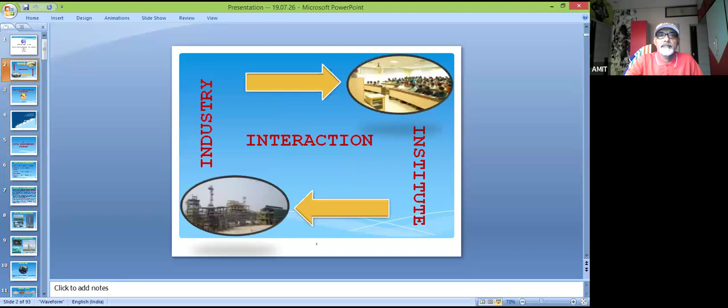अब आपके डेस्कटॉप पर जो भी फाइलें हैं वो शो नहीं करेंगी, केवल आपकी प्रेजेंटेशन ही शो करेगी। ठीक है, अच्छा हो गया सर, थैंक यू वेरी मच। ओके सर। हम थोड़ा वेट करते हैं, दस पाँच तक।

और हमारे कुछ और साथी जुड़ेंगे तो हम ऑन करते हैं। थैंक यू सर, थैंक यू। ओके। नमस्कार।

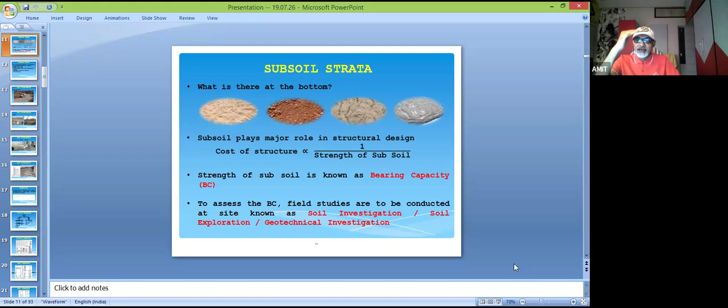See, every structure ultimately transfers its load to the ground. Therefore, understanding the behavior of soil is one of the most important responsibilities of civil engineer. Before construction begins, engineers conduct geotechnical investigations to determine soil properties, groundwater conditions, and bearing capacity. Without proper soil investigation, even the strongest structure can experience excessive settlement or failure. Remember the simple principle: a strong building always begins with a strong foundation.

Now, we'll touch upon various soil improvement techniques. Natural soil may not possess sufficient strength. In such situations, engineers improve soil properties using various stabilization methods or techniques. These include cement stabilization, thermal stabilization, electroosmosis, grouting, geotextile, reinforced earth, etc.

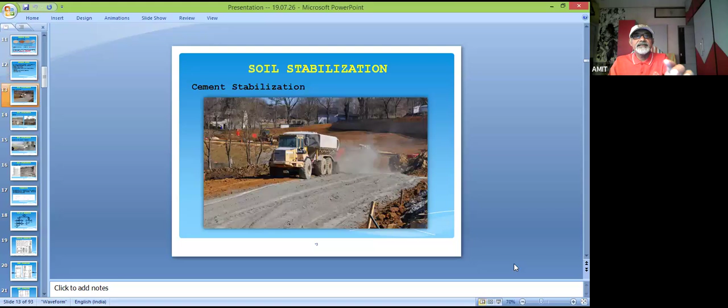You see cement stabilization, grouting we can show, geotextile and fabrics or geogrids, reinforced earth.

Choice depends upon soil type, project requirements, groundwater conditions, and of course, economic considerations. Modern ground improvement techniques enable engineers to safely construct highways, airports, bridges, ports, industrial plants, and high-rise buildings, even on weak soils, by way of soil stabilization or soil improvement.

This concludes the first section of today's presentation. In the next part, we shall move into foundation engineering, piling system, and various other construction practices.

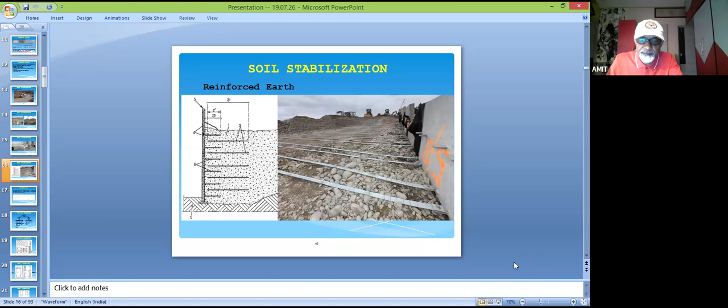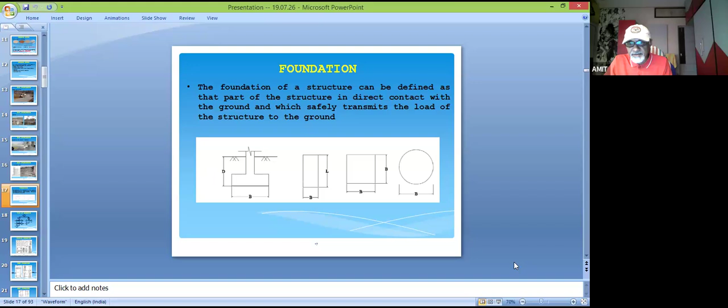Now that we understand the importance of soil, let us move to the foundation, which is the most critical component of any structure. A foundation transfers safely the load of a building or structure to the ground without causing excessive settlement or failure. Some sort of failure or some sort of settlement we allow in our design. The selection of a foundation depends on the soil bearing capacity, groundwater level, structural load, and site conditions.

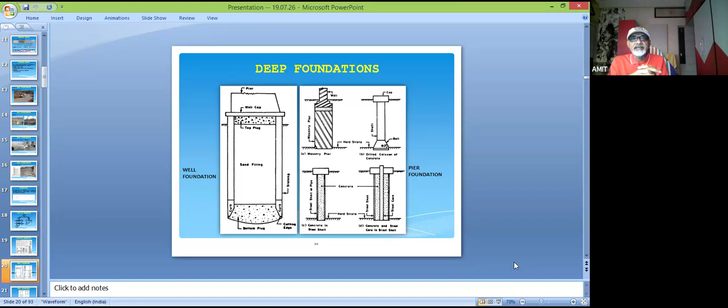These are all the types of foundations. The foundations are broadly classified into shallow foundations and deep foundations. Some of the shallow foundations are economical and are used where the soil has adequate strength near the surface. Deep foundations such as piles and wells are adopted when the upper soil layers are weak and the loads need to be transferred to deeper or stronger strata.

See some of the deep foundations we can show here.

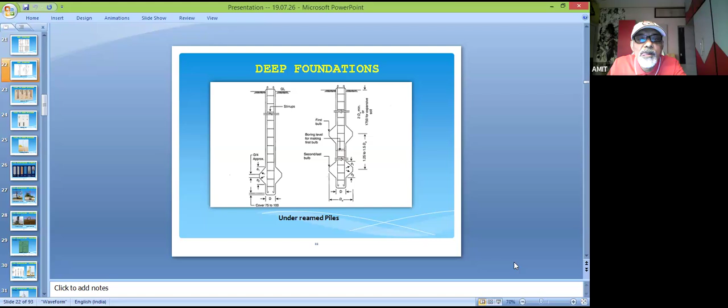As we know, a good engineer never selects a foundation based on cost alone. It is based on safety, durability, and long-term performance must always come first. Pile foundations are among the most widely used deep foundations in modern construction.

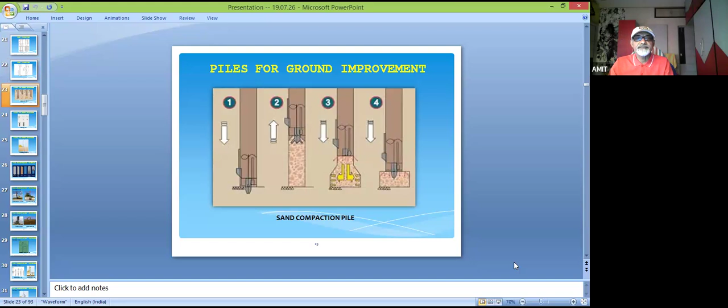This is one sand compaction pile. These are piles for ground improvement. You can see another, vibroconcrete columns.

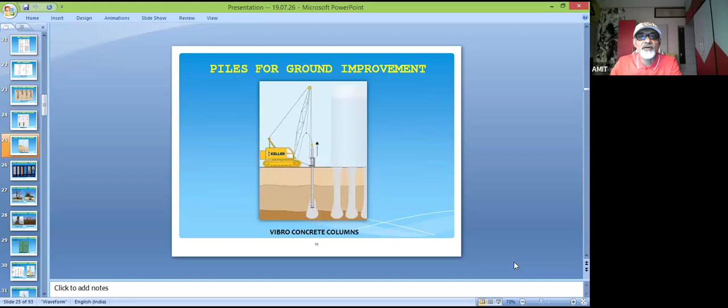They transfer structural loads through weak soil into stronger layers below. They are extensively used for bridges, high-rise buildings, ports, flyovers, industrial plants, and offshore structures.

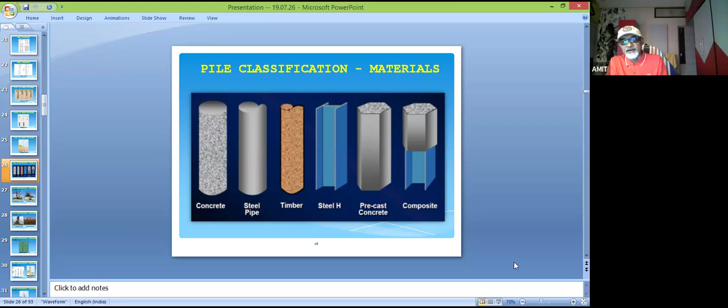Depending on project requirements, piles may be precast or cast in situ, and may be made of steel, timber, or composite. They may also be classified as displacement piles or replacement piles according to the installation method.

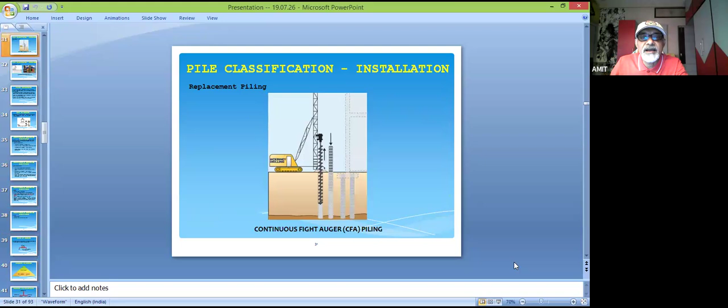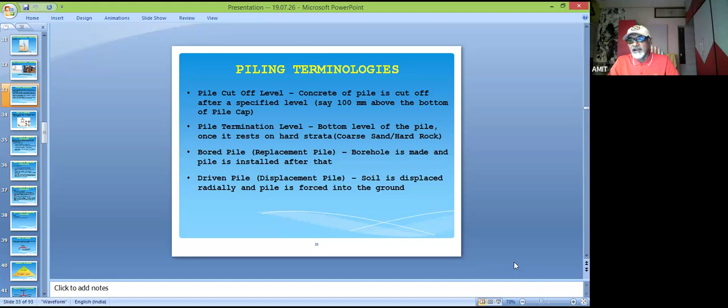Some terminologies: pile cutoff level, pile termination level, bored pile, replacement pile, driven pile - that is a displacement pile. During construction, engineers monitor pile depth, verticality, concrete quality, reinforcement placement, and termination level. Proper quality control during piling is essential because defects below ground level are difficult to repair after construction. So we should be very, very much careful while executing piling.

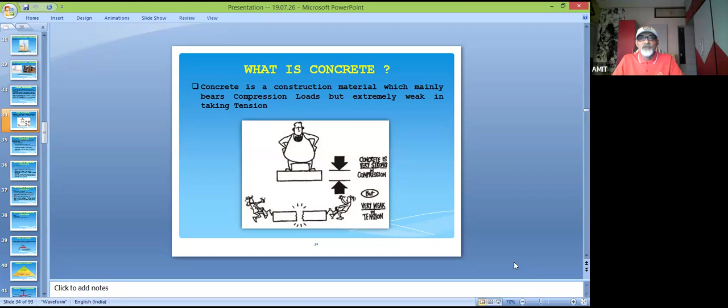Now let us move towards concrete technology. Concrete is often described as the backbone of modern structures. What is concrete? It is an artificial stone produced by combining cement, coarse aggregates, fine aggregates, and water in carefully controlled proportions. We can think of it like laddu, where all constituents are there, and the gur or syrup is the binding force to have that beautiful laddu.

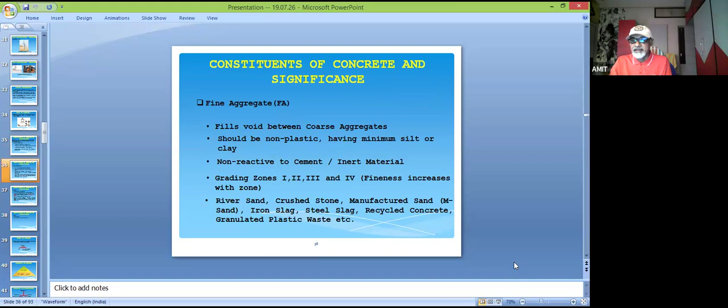So in that concrete, we can have coarse aggregates, we can have fine aggregates. Concrete performs exceptionally well in compression. Please remember, not in tension - it has very little tensile strength. That is why reinforcement steel is also embedded within concrete to create reinforced cement concrete.

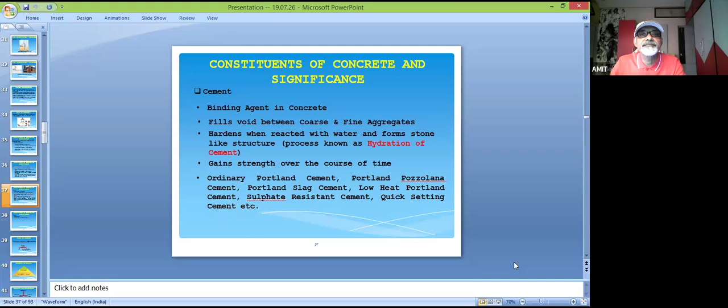This is about the cement. There are so many types of cement. What is the use of cement? Then, of course, the water should be potable with a pH value of not less than 6. The performance of concrete depends upon the quality of its ingredients, water-cement ratio, batching accuracy, mixing, placing, compaction, and finally curing.

This is the grade of concrete we usually denote, for example M25. M stands for mix, and 25 is the characteristic compressive strength in Newton per mm square. If we test 150mm cubes at 28 days, that strength should not be less than 25 Newton per mm square.

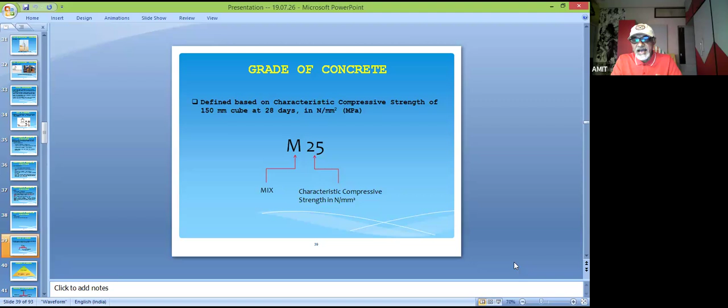Remember, high quality concrete is not achieved simply by adding more cement. There is a misconception that if you put more cement you will get better strength. It's not - it is achieved by maintaining proper proportions and good construction practices. Sometimes we use admixtures also as per specific requirements.

Some strengths of concrete: high strength concrete is 65 to 100, ordinary concrete is M10 to 20. Below that it is not actually concrete, it's PCC. Standard concrete is 25 to 60, and high strength concrete is 65 to 100.

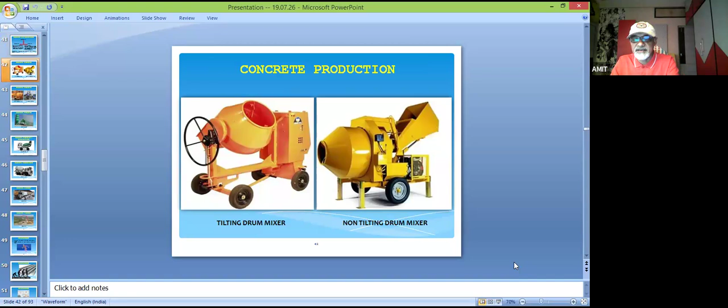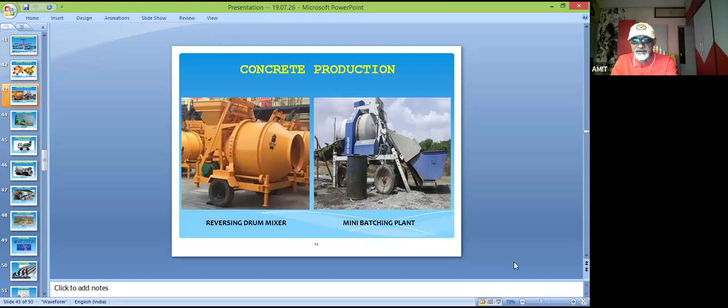After knowing what is concrete, now let us know about concrete production and placement. You can see this is the tilting drum mixer for small sites. The non-tilting drum mixer is there. Modern is the reversing drum mixer, the mini batching plant. Modern construction uses advanced equipment to produce and transport concrete effectively - that is called batching plants. This ensures accurate proportioning of materials.

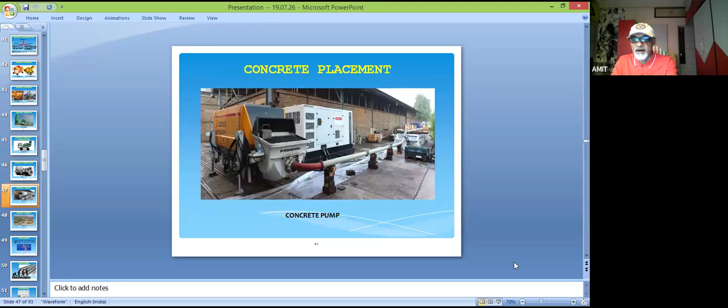During placement, engineers must avoid segregation, excessive free fall, and delays that may affect workability. Also, proper planning and coordination between batching, transportation, and placement are essential for achieving durable and high quality concrete structures.

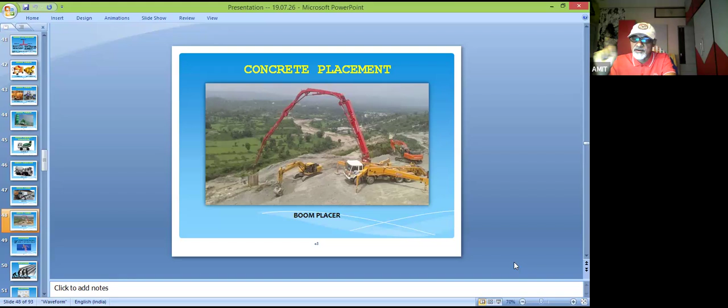We have just told that concrete is very much strong in compression, but not in tension. So now coming to reinforcement. Concrete alone cannot resist tensile forces effectively. Reinforcement steel provides the tensile strength required for beams, slabs, columns, and foundations. You may remember reinforcement just like a skeleton of a human body - just as bones provide strength and stability to our body, reinforcement provides strength and ductility to concrete structures.

This is the grade of reinforcement. How do you denote it? Fe, for instance, 550D. Fe means iron, that is ferrum, a scientific sign. Then 550 is the yield stress in Newton per mm square - that is the strength of that reinforcement, I mean that iron. The area of steel reduces if higher strength steel is used. And this D is the category for ductility - there are different types.

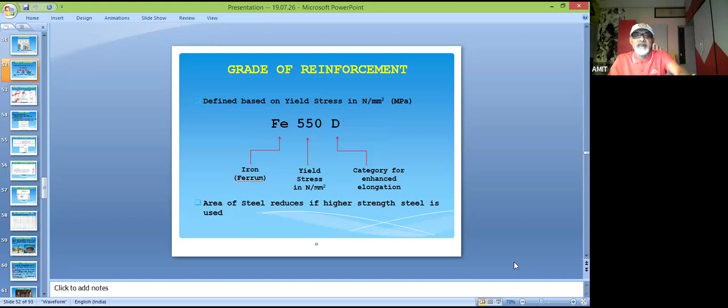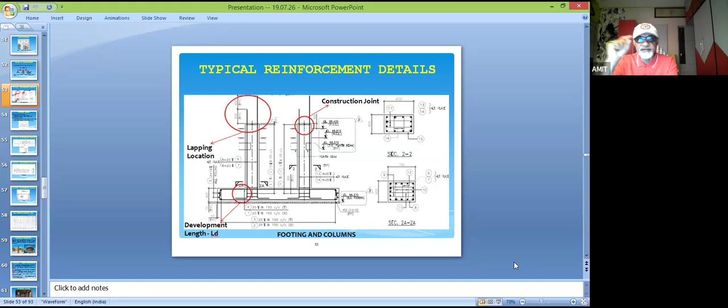Now we are coming to some typical reinforcement details. Usually there is a lap, then here is a development length, there is a construction joint - these are all there in the codes, and as per that we go ahead. Proper anchorage, development length, lap length, then spacing and concrete cover ensure that reinforcement performs effectively throughout the life of the structure.

These are the construction joints. Concrete mainly carries shear forces, where shear force is 0 or close to 0. And reinforcement lapping, reinforcement mainly carries flexural and tensile strengths, where bending moment is 0 or close to 0. So there is a lot of misconception at site, different places, where to put that lapping in the upper layer or the lower layer reinforcement. So that should be very clear from this diagram.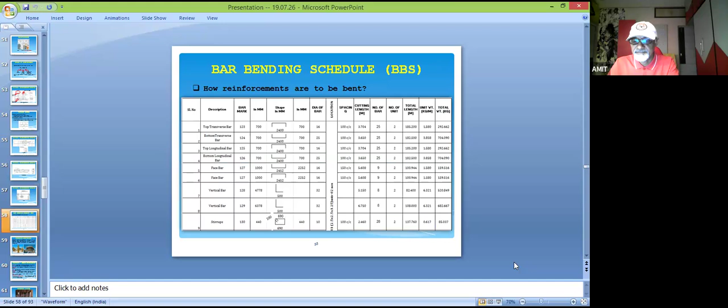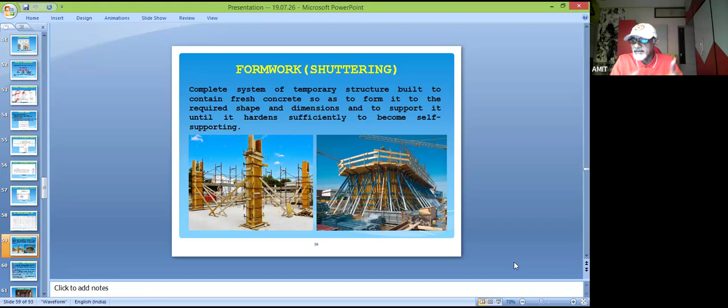Now we are coming to formwork systems. Formwork is the temporary mold into which fresh concrete is placed until it gains sufficient strength. So formwork will be removed only after the concrete which was poured inside it gains sufficient strength. An efficient formwork should be strong, accurate, so that there should not be rework after that, and reusable, economical, and safe.

This is the type of formwork you can see. The common terminology is soffit, then centering, then side, runner, prop, mold oil, or release agent.

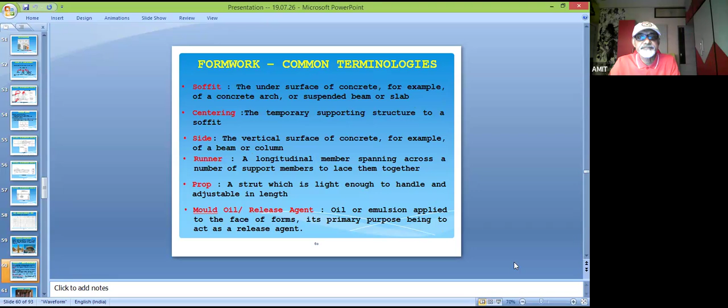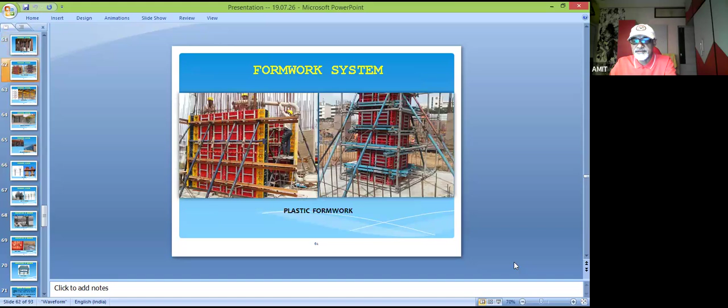Poor formwork can lead to dimensional inaccuracies, leakage of cement slurry, surface defects, or even collapse during concrete. Therefore, formwork inspection before pouring concrete is a critical quality control activity. Once concrete is placed, proper compaction removes entrapped air and ensures complete filling around reinforcements.

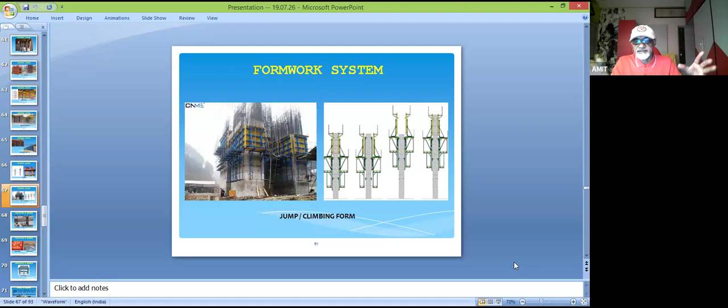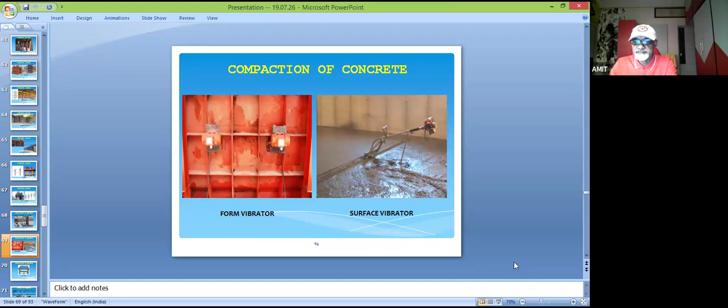After compaction, curing becomes one of the most important construction activities. Curing maintains moisture within the concrete, allowing cement hydration to continue and strength to develop. Inadequate curing can result in reduced strength, cracking, poor durability, and increased permeability.

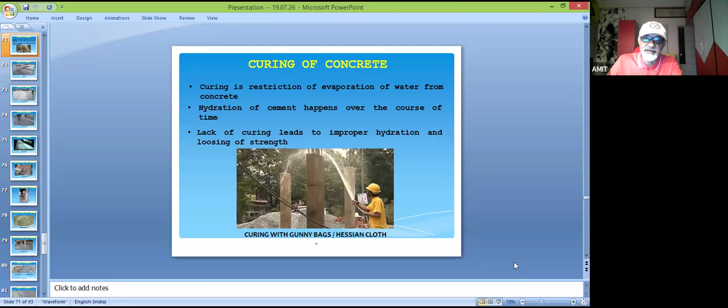A lot of types of curing are there. By ponding, this is use of curing compound, membrane curing, and steam curing.

Successful structures are built not only by good design, but also by disciplined construction practices. This completes the second part of our discussion. We shall now move to concrete defects, major concrete quality control, and some more construction equipments being used extensively.

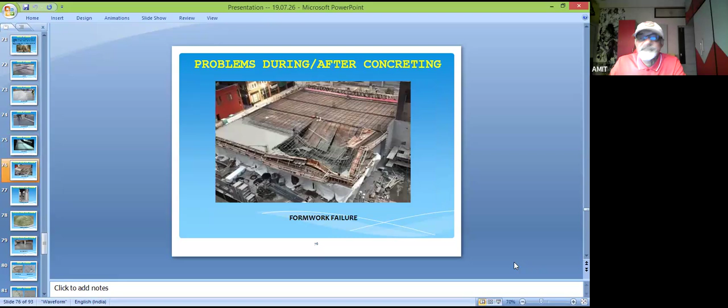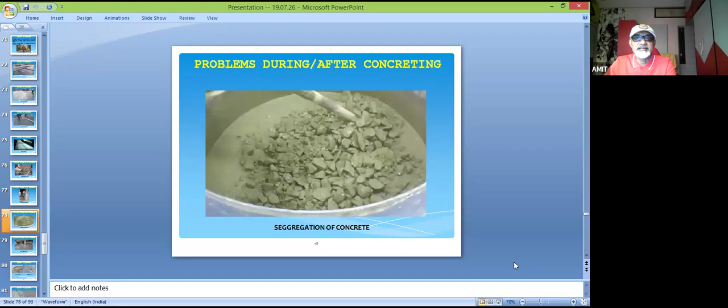Some common defects observed in concrete include segregation. This is the segregation of concrete. Then bleeding, delamination, honeycombing, cracking and crazing, blistering, and efflorescence. See, segregation occurs when coarse aggregates separate from cement mortar due to improper handling or excessive free fall.

Then bleeding results from excess water rising to the concrete surface. After vibration, that water comes out. Honeycombing usually occurs because of poor compaction or insufficient concrete around reinforcement. And cracks may develop because of shrinkage, thermal effects, overloading, or poor curing.

As engineers, our responsibility is not only to repair defects, but also to prevent them through proper planning, supervision, and quality control. Always remember the saying, quality is never accidental. It is the result of intelligent effort and disciplined execution. So what we say, quality control is the backbone of every successful project. Every stage of construction, from soil investigation to the final finishing, requires inspection and testing.

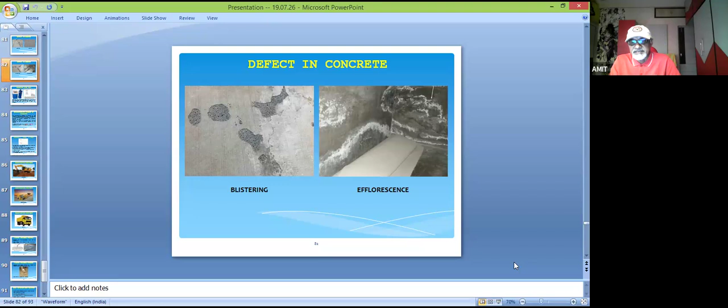Concrete cube testing is one of the most common methods for evaluating compression strength. Although cubes may be tested at 7 days to monitor progress, the standard acceptance test is performed after 28 days of curing. Actually, there will be 3 sets of cubes taken, and it will be tested in the typical crushing machine to get the strength. This is the sampling of the cubes to be taken depending on the cubic meter of the concrete being poured.

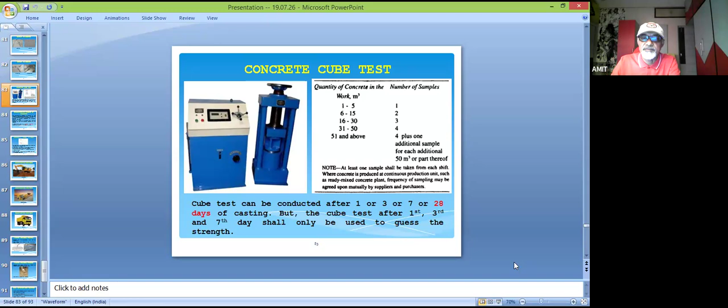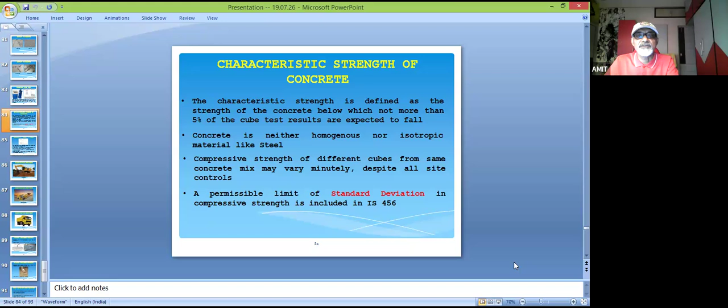This is the characteristic strength of the concrete. It is defined as the strength of concrete below which not more than 5% of cube results are expected to fall. Concrete, we know, is neither homogeneous nor isotropic material like steel. Compressive strength of different cubes from the same concrete mix may vary minutely despite all site controls. And the permissible limit of standard deviation in compressive strength is included in IS 456, which is the relevant code for concrete. Not more than 5% of samples should fall below the characteristic strength.

The formula is there, where FCK is the characteristic strength, and S is the standard deviation. Cubes are made in controlled environment and cured in submerged condition.

Besides cube testing, engineers inspect reinforcement placement, concrete cover, formwork alignment, pile integrity, material quality, workmanship, everything. Parallelly, documentation is also equally important. Site records, inspection reports, and test certificates ensure traceability and compliance with engineering standards.

Remember that quality cannot be inspected into a project after completion. So it must be built into every activity from the very beginning.

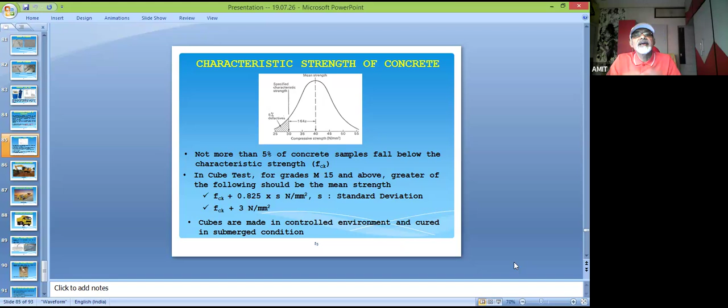Modern infrastructure projects rely heavily on mechanization. Excavators perform earthwork efficiently. Backhoe loaders are versatile machines for excavation and material handling. Dumpers transport materials. Transit mixers and concrete pumps we have already covered earlier.

Mechanization increases productivity, improves safety, reduces labor dependency, and shortens project duration. However, equipment alone does not guarantee success. Skilled operators, preventive maintenance, and proper planning are all equally important.

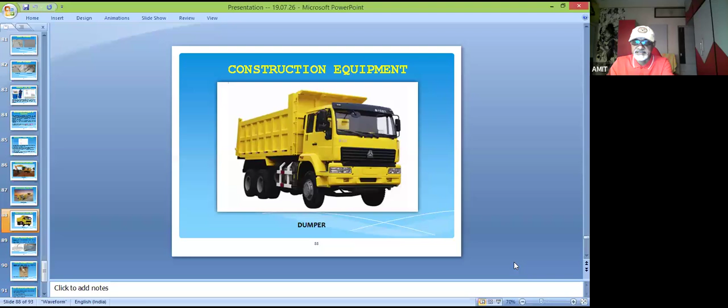Now we will show an example of one specialized type of construction activity. This is vacuum dewatered flooring, concrete with low water cement ratio but high workability, giving high strength and durability due to the low water cement ratio. It is compacted with a power floater to improve compaction and smoothness of the floor. This is usually used in industrial flooring.

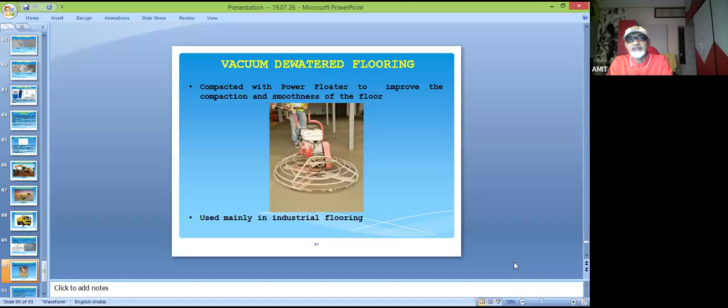Today's construction industry is evolving rapidly. Successful engineers combine technical knowledge with leadership, communication, and ethical responsibility.

Engineering is ultimately about protecting human life and creating infrastructure that serves society for decades. So every decision we make on site has long-term consequences.

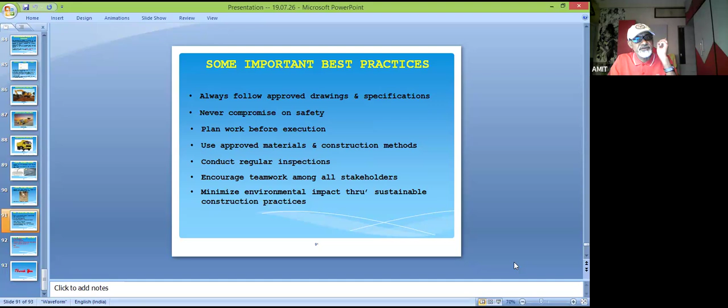The future of civil engineering is really exciting. Nowadays we have digital technologies transforming how projects are designed, executed, and maintained. Artificial intelligence is improving project scheduling, quality prediction, and maintenance planning. Automation, robotics, prefabrication, 3D concrete printing, and smart materials are redefining modern construction.

Building information modeling, commonly known as BIM, enables engineers to integrate design using Tekla and other software modules, planning and execution, all on a single digital platform. Drones are now used for surveying, inspection, and construction monitoring.

At the same time, sustainability has become a major priority. Future engineers must focus on reducing carbon emissions, conserving natural resources, and constructing environmentally responsible infrastructure. The engineer of tomorrow must combine technical excellence with innovation and sustainability.

So before concluding, let us quickly summarize today's discussion. We explored the complete journey of civil engineering from design to demolition.

We understood the importance of soil investigation and foundation selection. We discussed pile foundations, concrete technology, reinforcement, formwork, and construction equipment. We emphasized quality control, proper curing, and defect prevention. Finally, we looked toward the future of civil engineering through digital technologies and sustainable development.